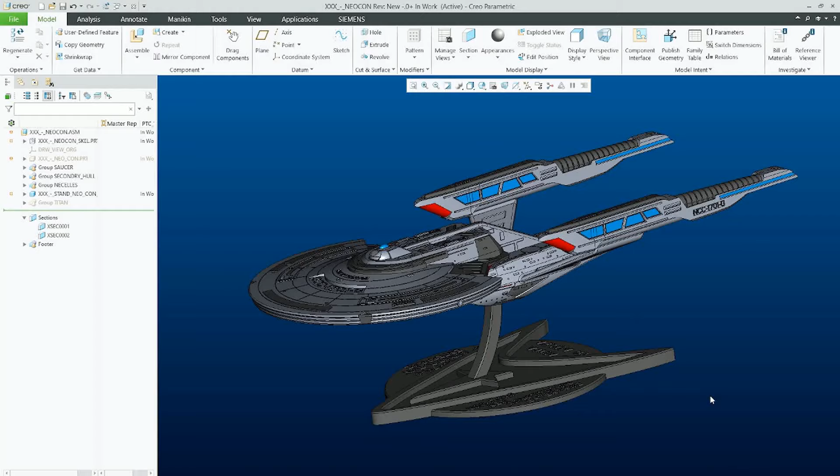Today we will take a look at the Neo Constitution class USS Enterprise G. Without further ado, let's go straight into Creo and take a look. Here we are, and this is the ship. So now I will get rid of the stand and we will take a look at the model itself.

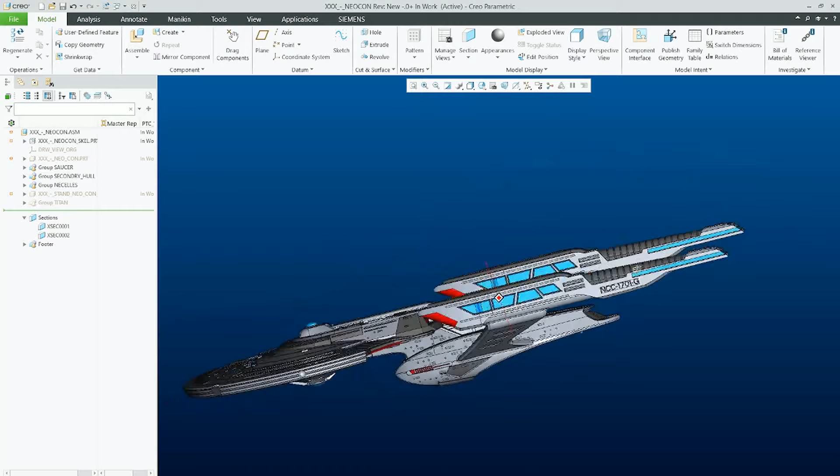As you can see, it's done to be as close to the ship in the show as possible, and I think that I succeeded in that.

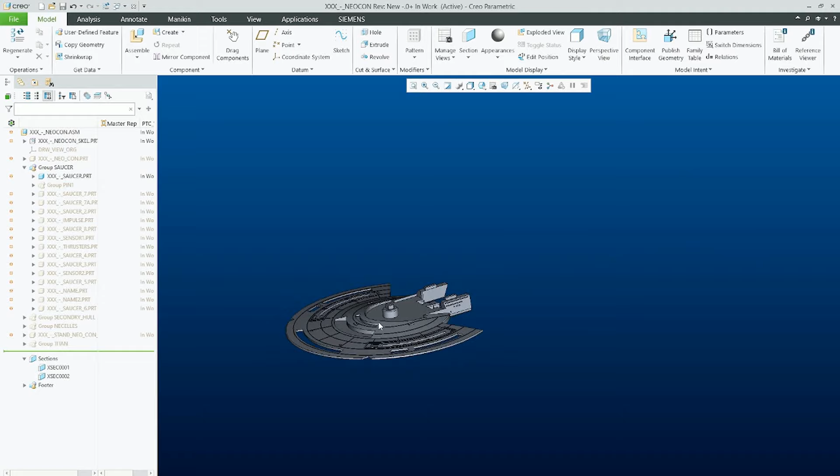The ship is once again divided into three parts: saucer, secondary hull, and the nacelles. So now we will start and take a look how everything goes together, because here it's a little bit more different. We start with this part of the saucer.

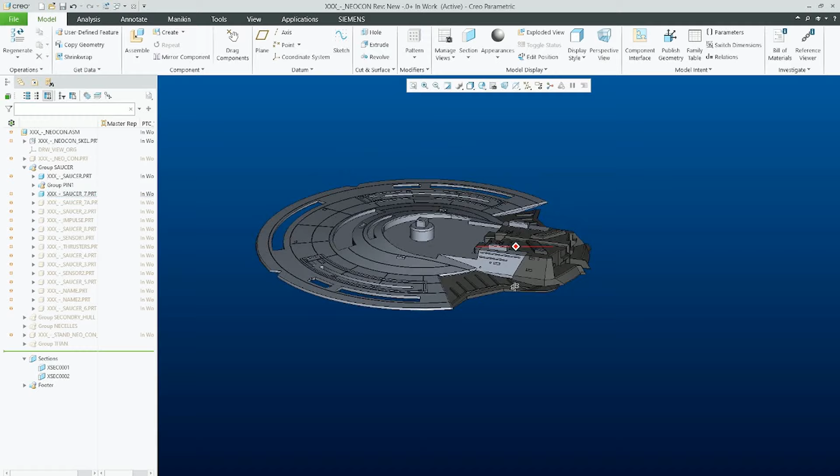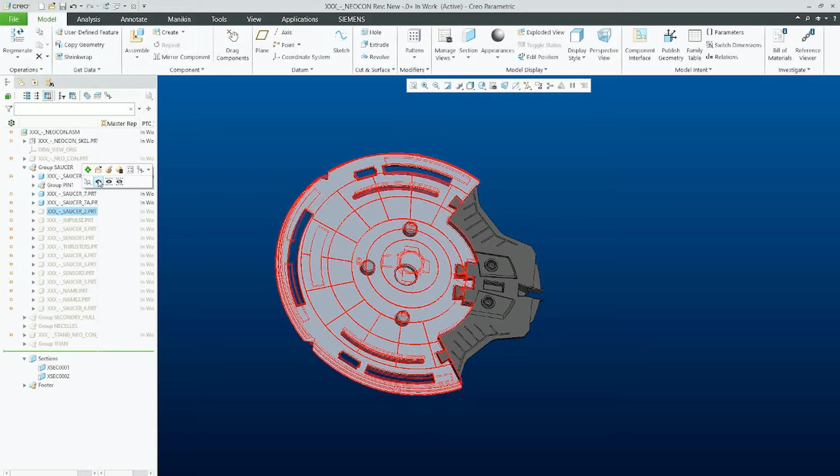As you can see, holes for the pins 10 by 10. Now we don't put the second half of the saucer, because here we have to first add the dark pieces. First we will have this big piece, and as you can see it is inserted here via the locks. Now the second half of this piece, which goes here and could theoretically be attached already to the second half of the saucer, but no matter. Only then we will add the second half of the saucer. The two halves of the black pieces are held together by the saucer. Sure, they aren't held by anything here yet, but that will come later.

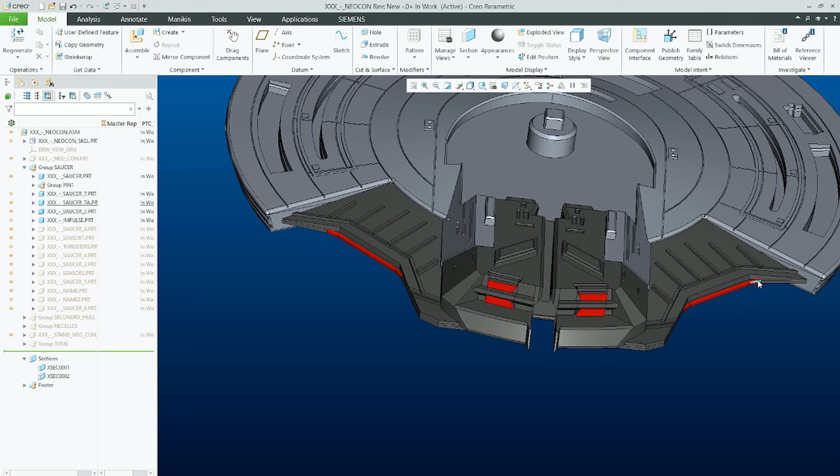Now here to these slots we will insert the impulse engines. Those red impulse exhausts actually have to be painted. I'm sorry, but that's basically 5 strokes of a brush. Anyway...

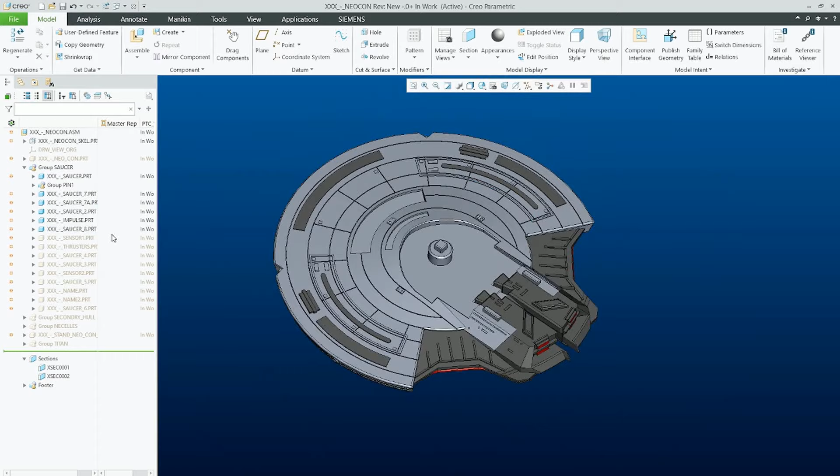Now all the black pieces here also serve as mounting points, so they are connecting the two halves of the saucer together. You will insert them, and now here to the bottom you will insert the sensor, which once again goes through the halves and connects the two saucer halves together.

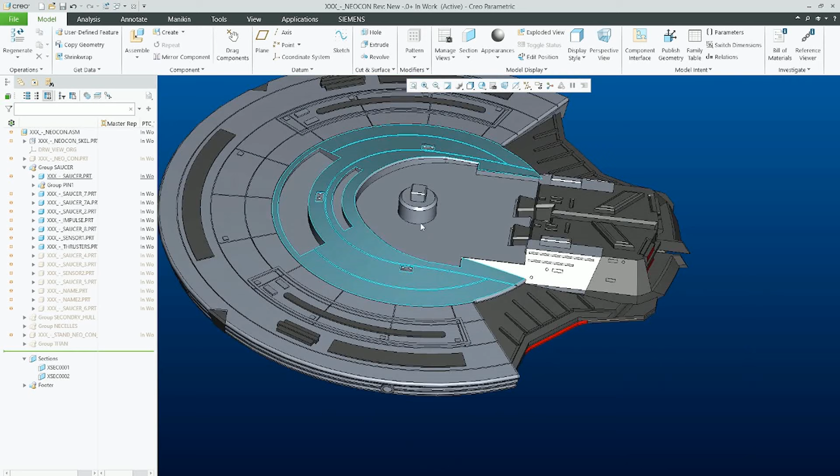Now here to this back we will insert the thrusters on both sides, and now here to this back and to those locks we will insert this black part of the saucer. On it we will insert this gray part, and here to this opening sensor, and here we will add this piece.

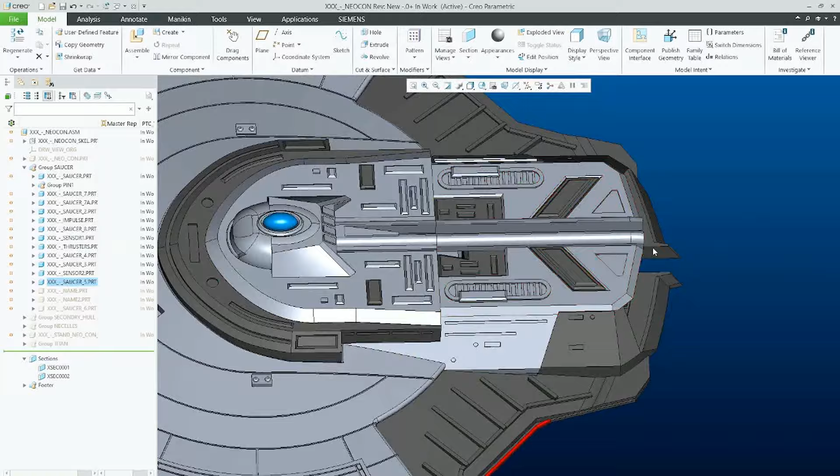Okay, and now to the openings we will put the cassettes with the name. So here's the upper one and here's the bottom one. As you can see here we have also openings, and that's for these parts. And that's it, that's the saucer finished.

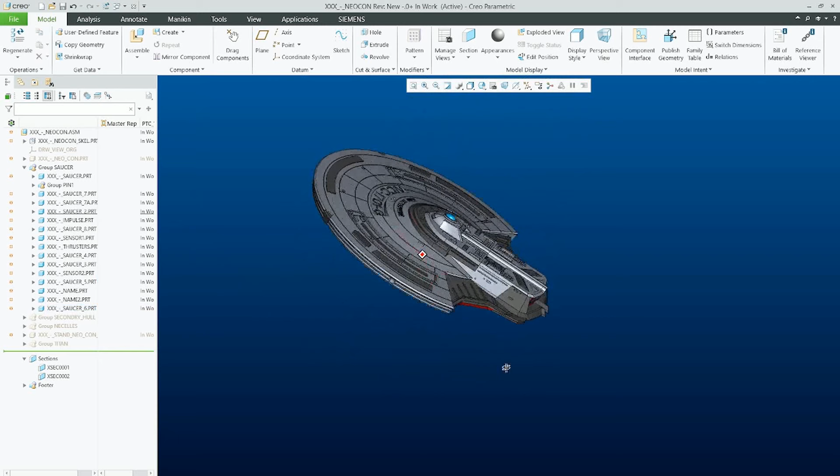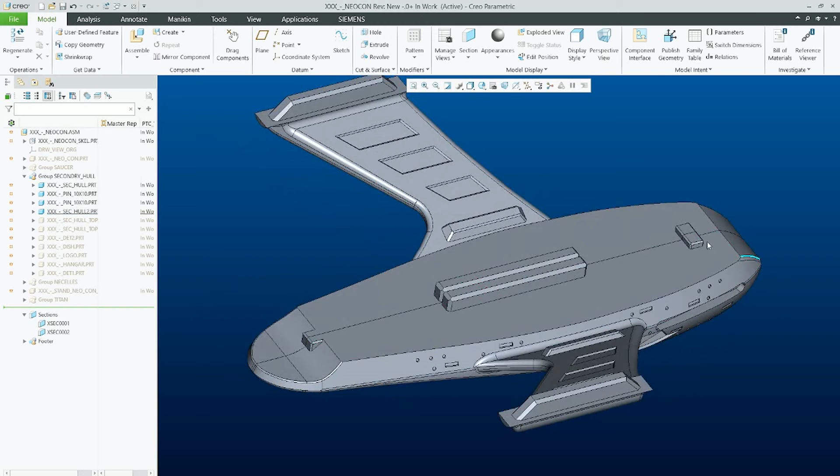So we will now take a look at the secondary hull. So we have one half, I already put the 10 by 10 pins. Then we have the second half, and as you can see here we have now the backs. So we will insert the top piece, and the second top piece, and simply slide it over and click everything together. And now it's time for details.

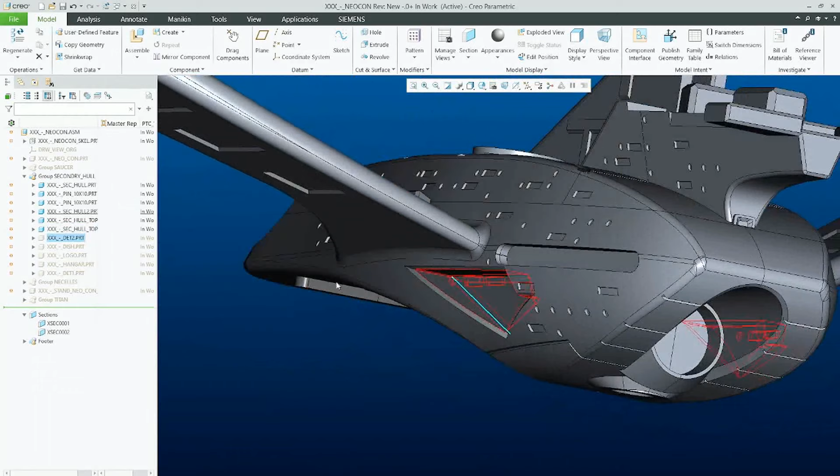So here those black pieces or dark pieces are inserted. Here we will insert, of course, the dish, a logo, and here the two halves are connected via the hangar.

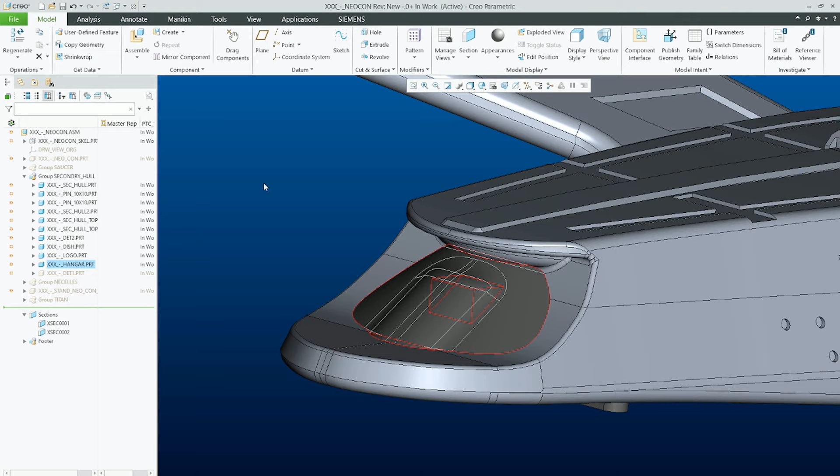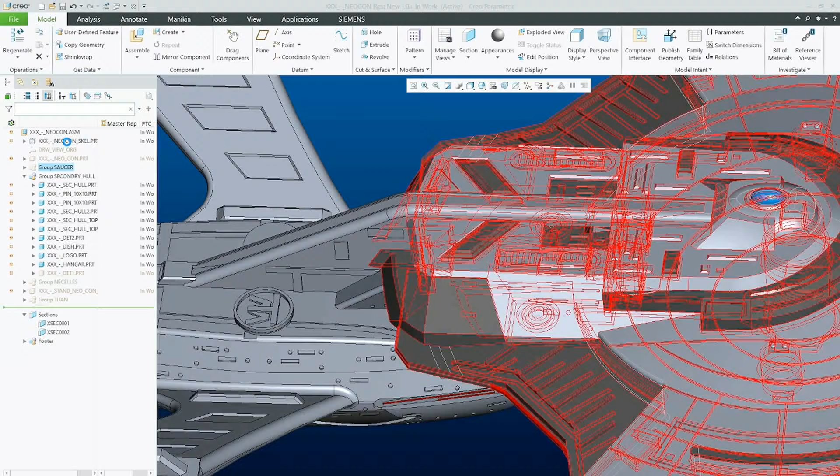This piece, well, not yet, because now when we have the secondary hull done, you can see that it has the lock here, and peg here, and that's to attach the primary hull, the saucer. So you will simply slide it on, and when the two halves are together, you will see that you have here this big opening, and into it you will simply insert this big dark piece, and you have it done.

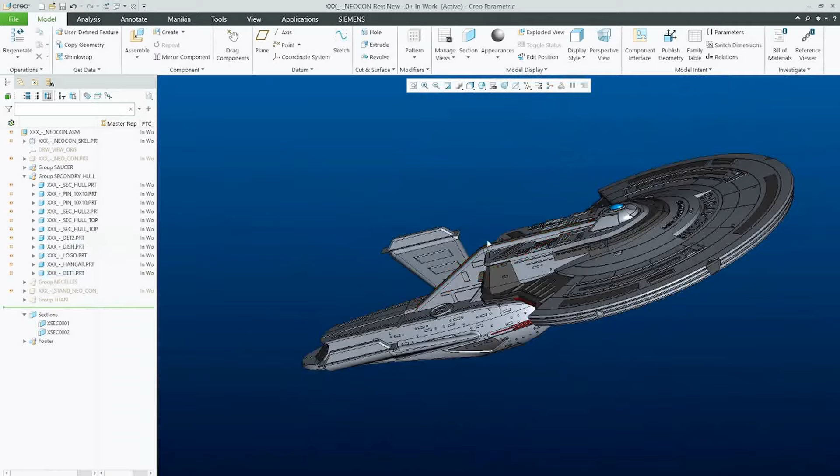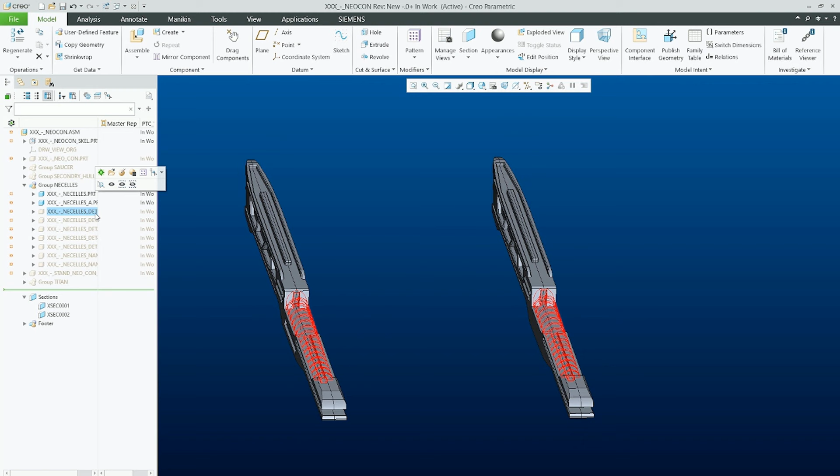Okay, and now we will take a look at the nacelles. So we have one half and we have two halves. They are not held together by anything yet, but basically first we will add this piece, and this piece has a corresponding hole to those pegs, so it will hold the two halves together.

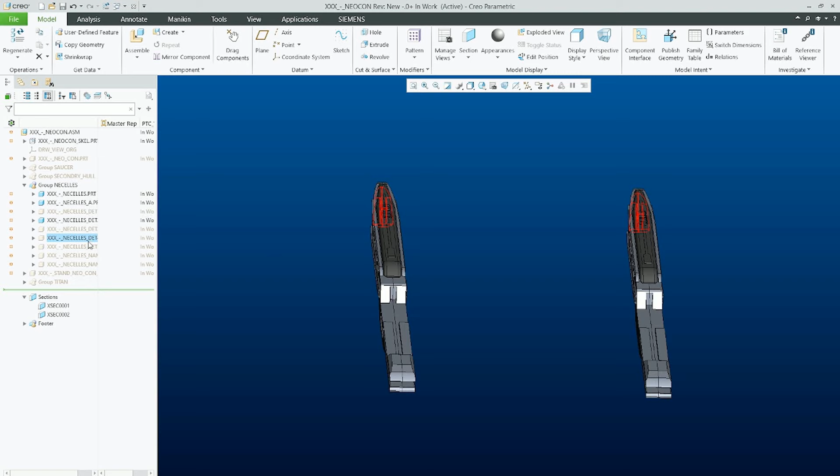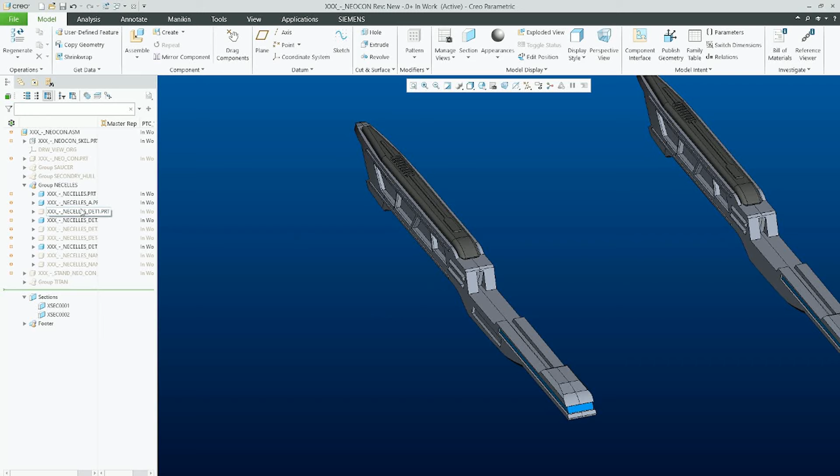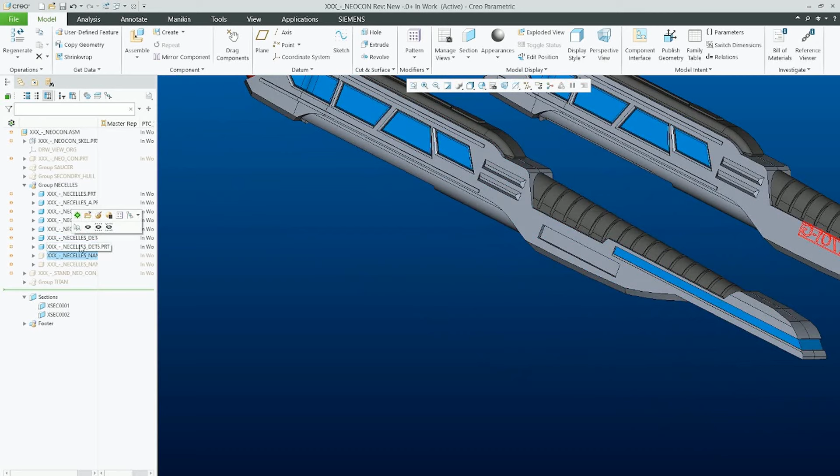Then here this blue piece, you will slide it in and it will once again hold the two halves together, so you don't need any pegs. But still, maybe some glue may not be a bad idea. Anyway, here I will insert this dark piece, here all the blue pieces, and now here we will simply insert the Bussard collectors, and of course here we will insert the name on both sides. And that's it.

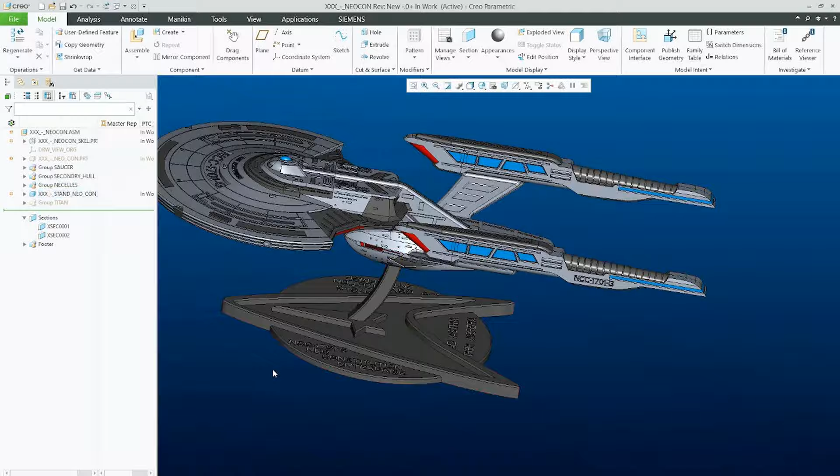And as you can see here, we have the opening for the pylons, so you will simply slide them over, and that makes the ship done. Now the stand is exactly the same with the new info, and that's basically it.

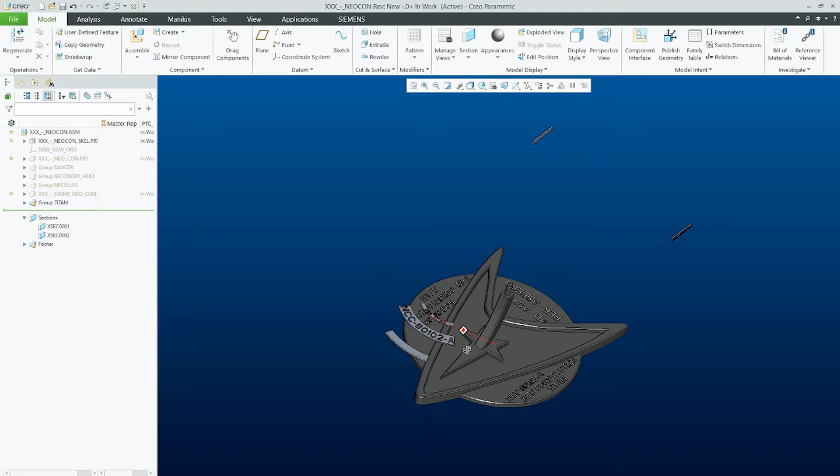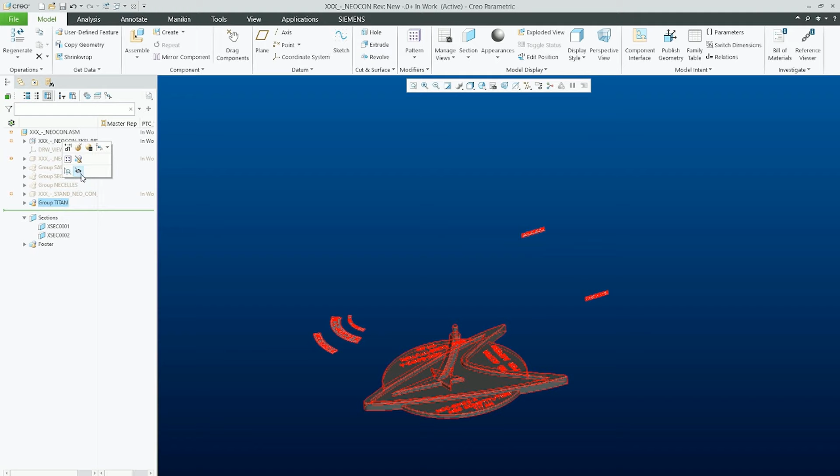However, there is one possibility for you, and that's maybe you don't prefer this ship to be Enterprise G, but you would like to have it as Titan A. For that case, here are the optional stand with the info and optional placards with the registry number and the name. So if you don't like to have it as the Enterprise G, go ahead and simply print those and use them. I prefer to have it as Enterprise G, and that's why I have this.